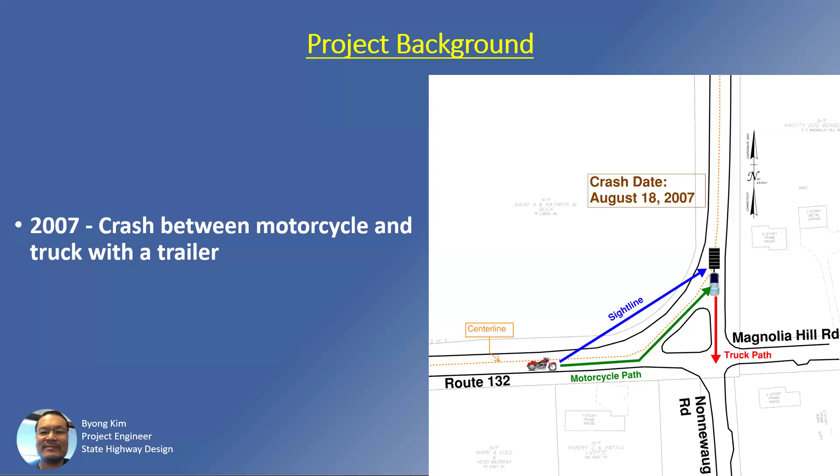In 2007, a crash between a motorcycle and a truck towing a trailer occurred at the project location, resulting in a fatality. The biker was heading eastbound on Route 132, but due to substandard sightline, he saw the southbound truck too late and ended up hitting the trailer.

The existing sightline and intersection sightline are substandard. The top right photo shows the existing berm blocking the driver heading on Route 132 southbound. The bottom right photo shows lack of sightline from Nonnewaug Road looking left to Route 132. Also, the geometry of the existing grass channelized island creates confusion to drivers, since Route 132 turns 90 degrees heading eastbound. The eastbound driver has to turn left to stay on Route 132. This driver would go straight to get onto Magnolia Hill Road, which is not a normal movement.

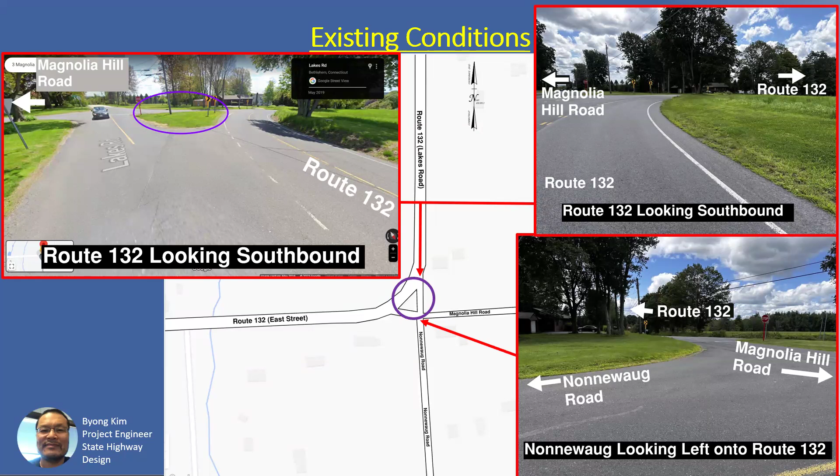The purpose of the project is to correct the deficient sight distance on Route 132. The top left photo shows the driver's view being blocked by the roadside embankment. It will also address the insufficient intersection sight distance from Nonnewaug Road looking left onto Route 132, as shown on the bottom right photo. The project will also simplify the intersection geometry. The top right photo shows the overcomplicated channelized intersection.

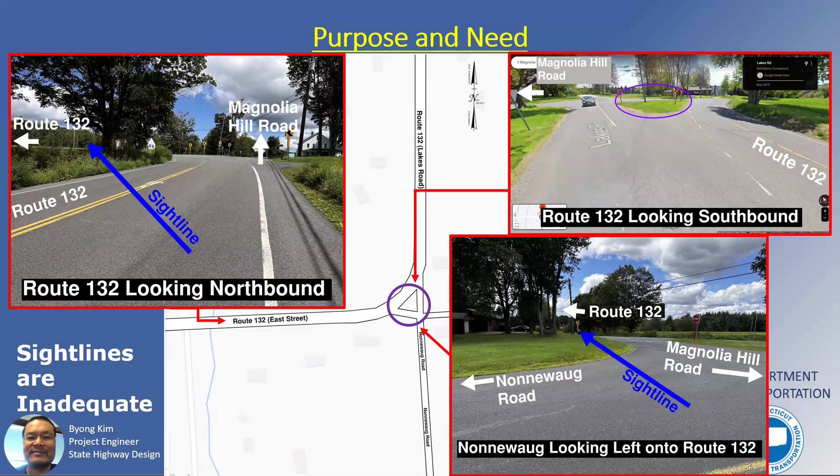Good evening, everyone. My name is Albert Yaldeh, and I'm the project designer, and I will go over the proposed changes. The proposed project includes making a cut into the embankment on the inside of the curve of Route 132, which will dramatically increase the sightline.

A swale is proposed to be constructed in this new cut area to assist with drainage of the road that will outlet to a body of water found directly west of the project limits. The curve of Route 132 will be made slightly larger to accommodate the vehicle speeds. Magnolia Hill Road will be realigned to create a T intersection with Route 132, and Nonnewaug Road will be realigned to create a T intersection with Magnolia Hill Road. Sidewalk will be installed on the southern side of Route 132.

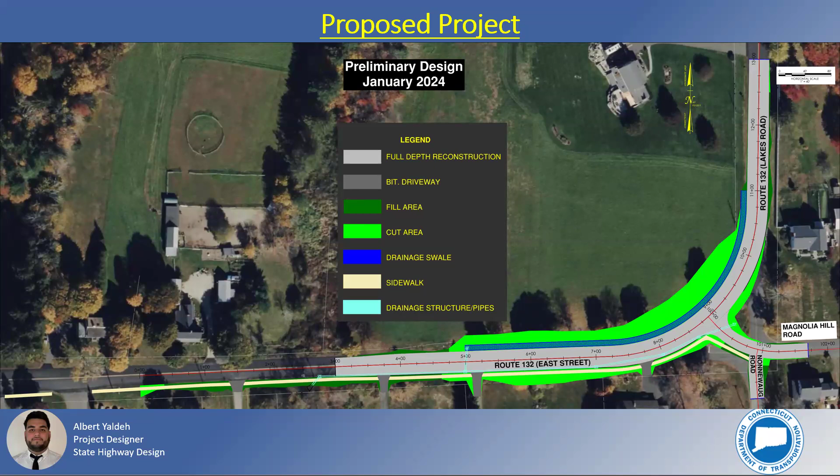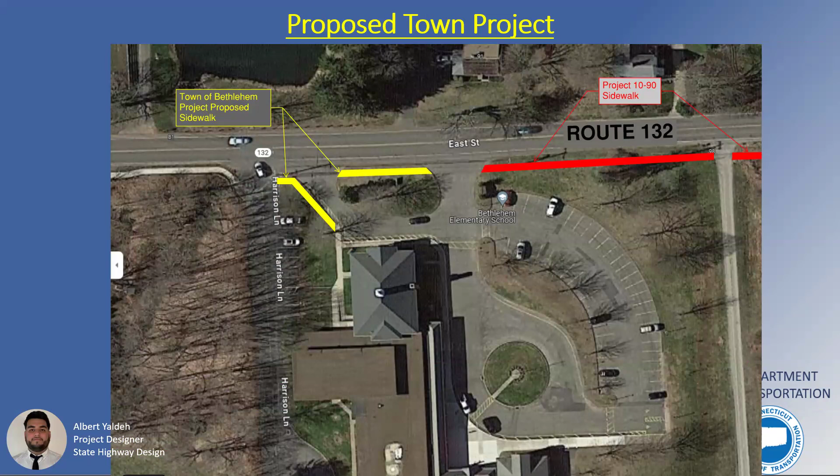There will be alternating one-way traffic during construction from Monday to Friday, 9 a.m. to 3 p.m. Access to all driveways will be maintained.

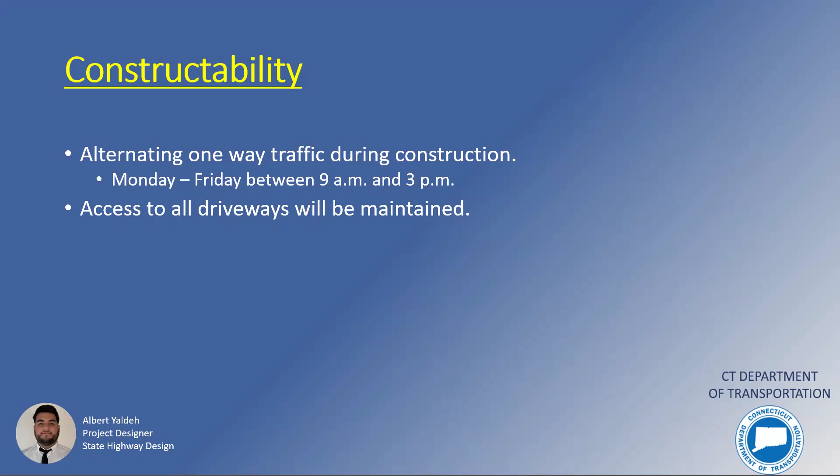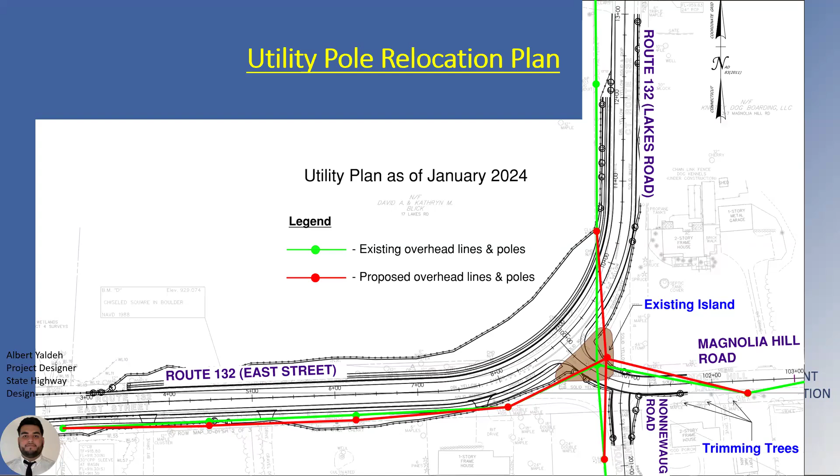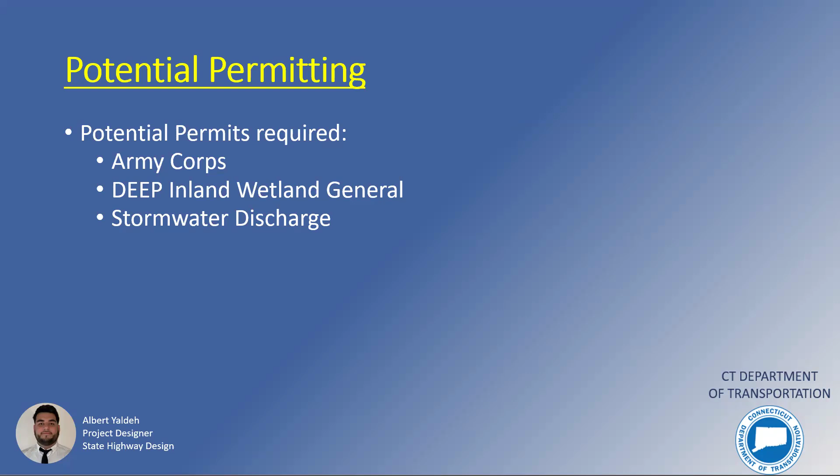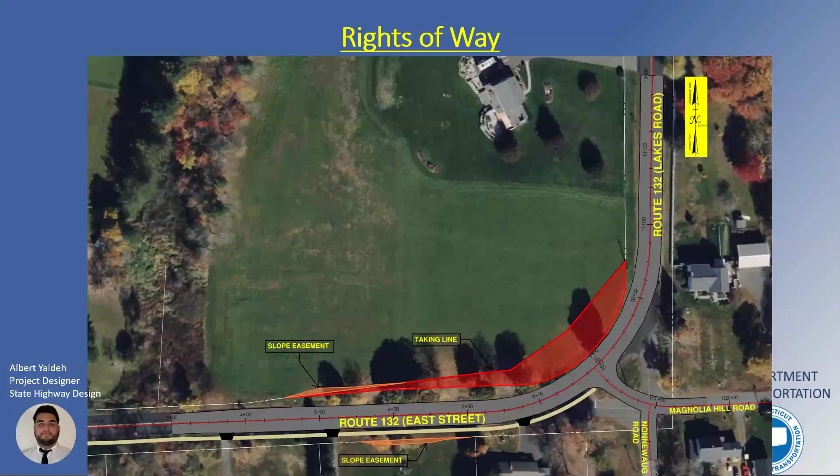My name is Zachary Guarino, and I'm a project coordinator with the department's Division of Rights-of-Way. Our office is responsible for acquiring the property rights needed for transportation projects. As mentioned in the presentation, this project will require the acquisition of property rights, so I'd like to give a brief overview of our acquisition process.

Before I begin, I'd like to mention that the specific impacts are still being finalized and may change as the design progresses, and that any required property rights will be acquired in accordance with Connecticut General Statutes, Sections 13A-73 and 13A-98E, as well as the Uniform Act.

Next, our office will determine the fair market value of those property rights depicted on the property map, which will be used to establish an offer of just compensation. That offer will be sent out to the property owner in writing, and a right-of-way agent will be available to meet with the property owner and explain the project, go over the specific impacts to their property, and explain the state's offer. The property owner will have a reasonable amount of time, typically 30 days, to consider the state's offer.

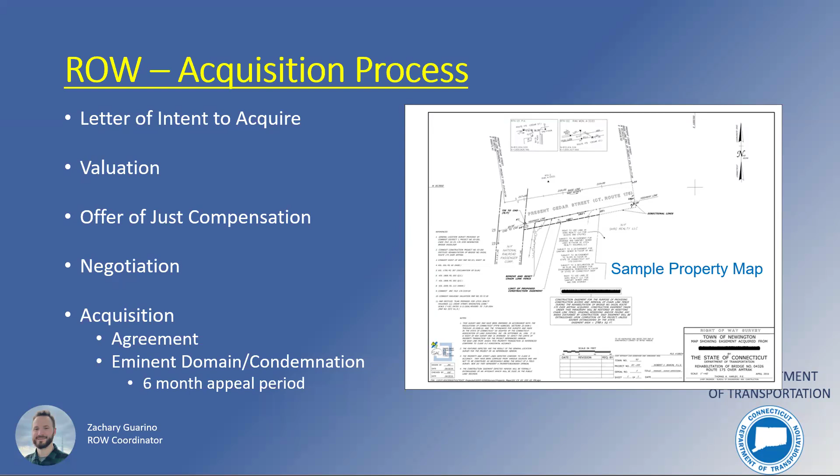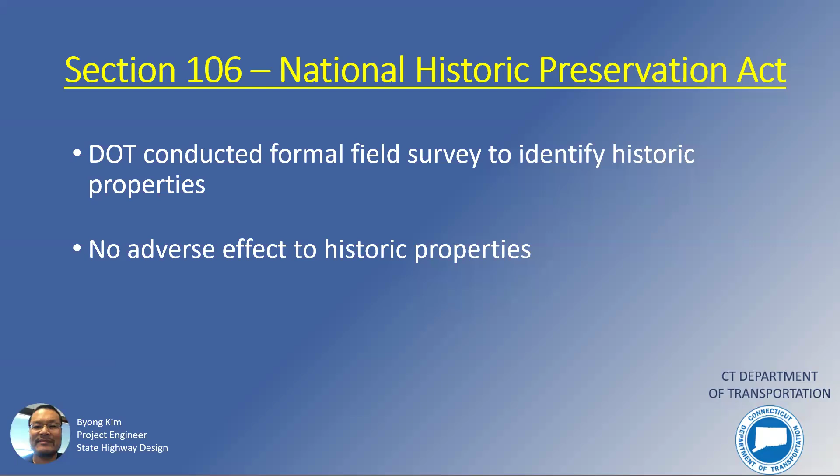Thanks, Zach. Section 106 is about effect on historic properties. DOT conducted a field survey to identify historic properties. Based on the result of the survey, DOT anticipates no historic properties affected.

I'll now finish this presentation by going over the project cost and schedule. The engineering is about $1 million, rights-of-way is about $50,000, and construction cost is about $2.9 million, for a grand total project cost of about $4 million.

This project is funded 80% by the federal government and 20% by the state. The design is anticipated to be completed in May of 2025. Construction will begin in the fall of 2025 and end in fall of 2026.